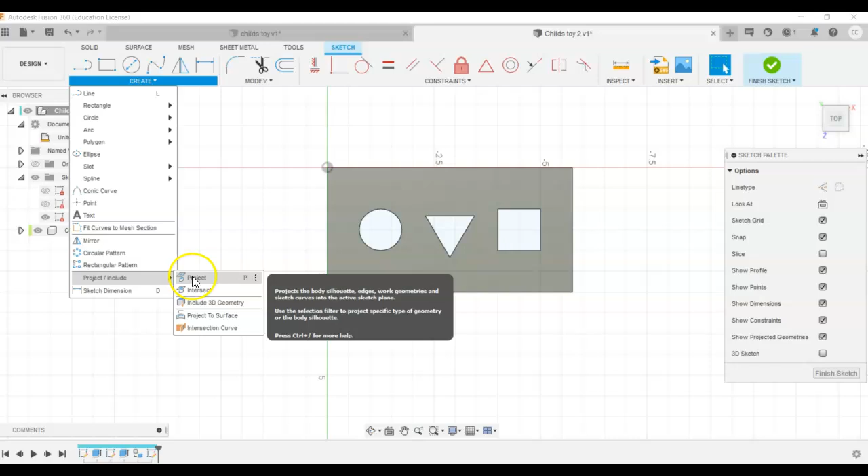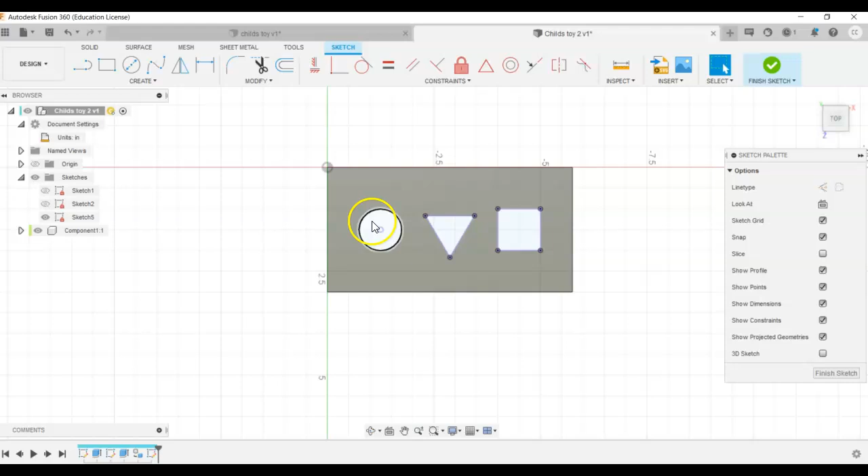I'd like for you to just click the circle and then hold down the Shift key and click all the other lines for all the other shapes. Just click everything you can. Don't stop clicking until all these lines turn blue. Once they're blue, you can say OK, and they turn to like a purple color. When that's done, you can go ahead and finish the sketch.

We're going to use this geometry to make our pegs. So turn on Extrude, click the circle. The dimension for this is 3. And before you say OK, where it says Operation New Body, you want to make that a new component. Say OK. You'll notice the purple lines went away.

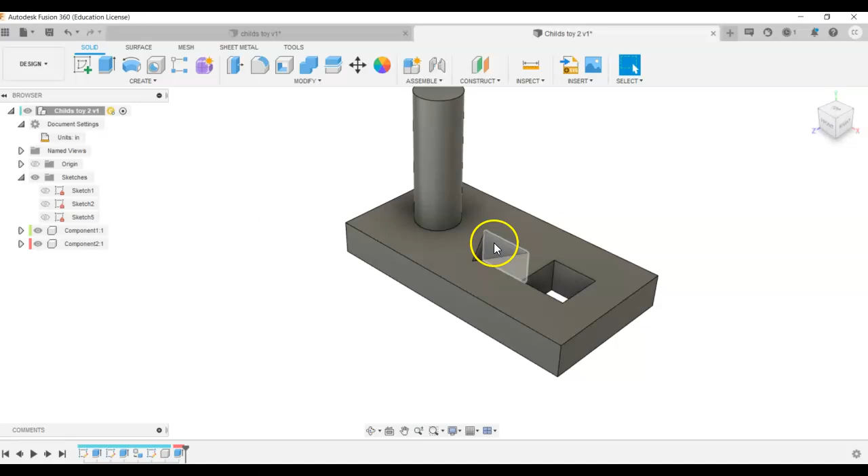That's because our sketch has been what's called consumed. But we can make it visible again by clicking the little eye to the left of our sketch underneath the Sketches tab in the browser. So that makes the sketch visible again.

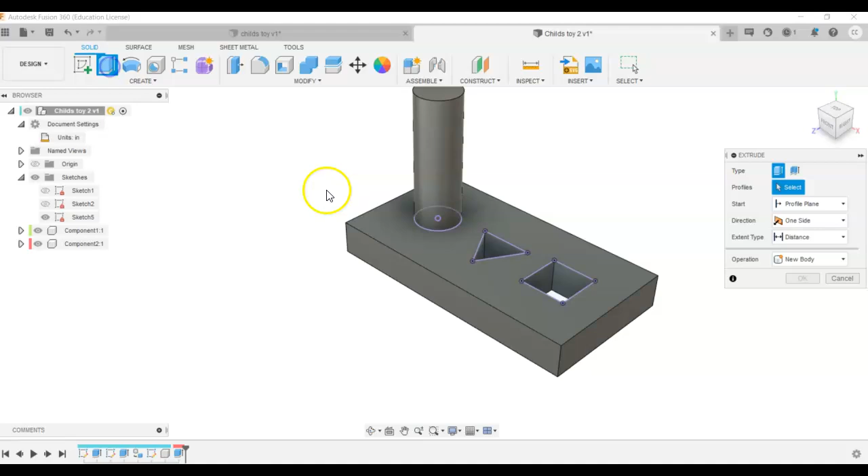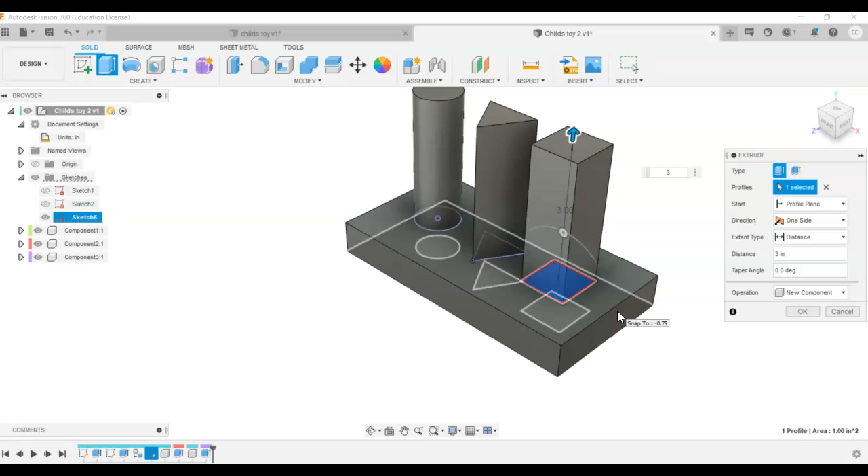We're going to go ahead and do the same thing with the triangle. Click the triangle, make that a 3, and make it a new component. Say OK. And do the same thing for the square. Once you turn the sketch back on and make it visible, it stays for the rest until you make it invisible again. All right, so now we've got our 3 pegs.

They're all their own components. So let's take a minute and just kind of name all the 4 different components we've got. This first one, just double click on the word component 1. We're going to call this one central panel.

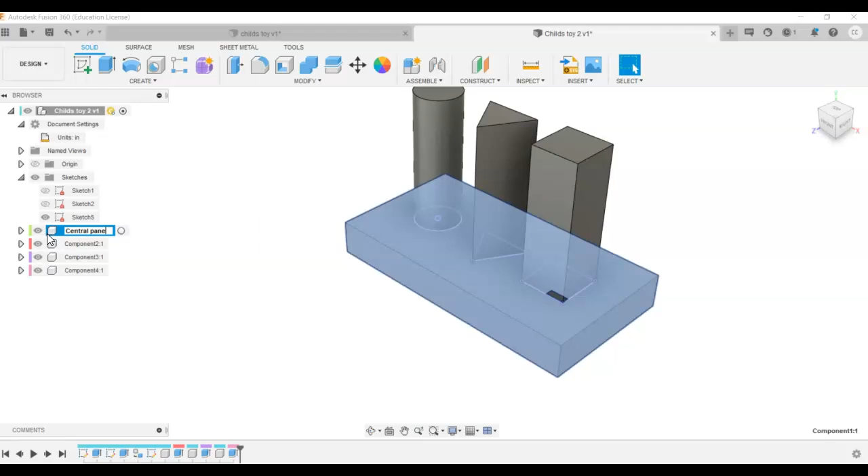And component 2, well, that's the circle. Maybe we'll call it... how do you spell cylinder? Cylinder, I think that's right. Peg. This one is the triangle peg. And this one is the square peg.

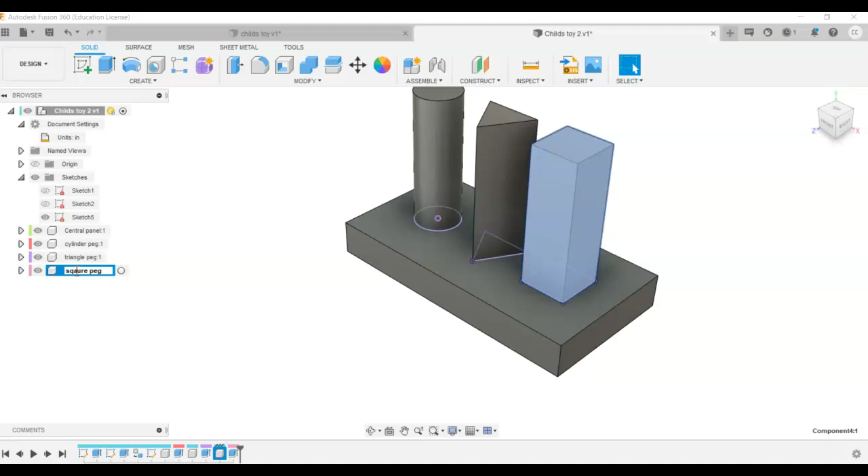All right, so now we've got all of our 4 different components. They're all separate from each other. And let's go ahead and assign some color values to these things.

The sketch is bugging me, so I made the sketch invisible again. I'm going to turn on Appearance up here at the top. And Bodies and Components is what I want. So let's just find some good colors. Under Paint, there should be some good colors.

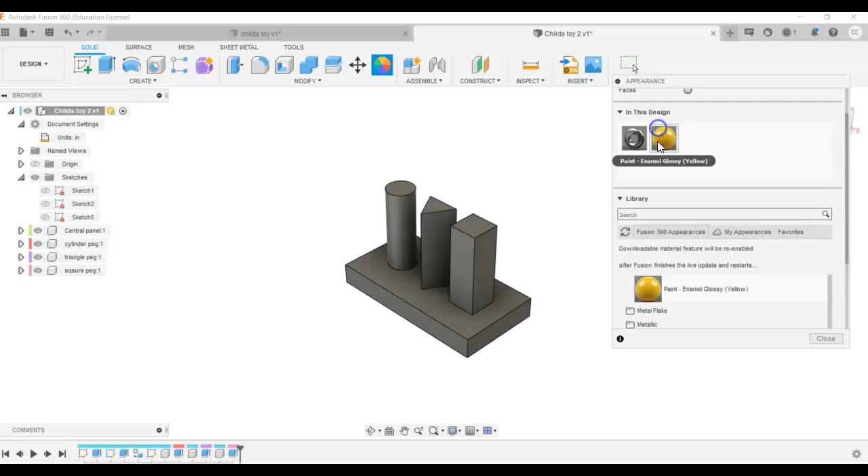How about we go with glossy paint? Let's just do that. So let's have a yellow. And this thing never seems to be tall enough, what we want to do. So zip up here. I like to fill my palette with different colors. We'll make a blue peg, and then how about a red peg? For the panel, that looks like maybe more like it should be wood, so I'll choose Bamboo Light Semi-Gloss. How's that sound?

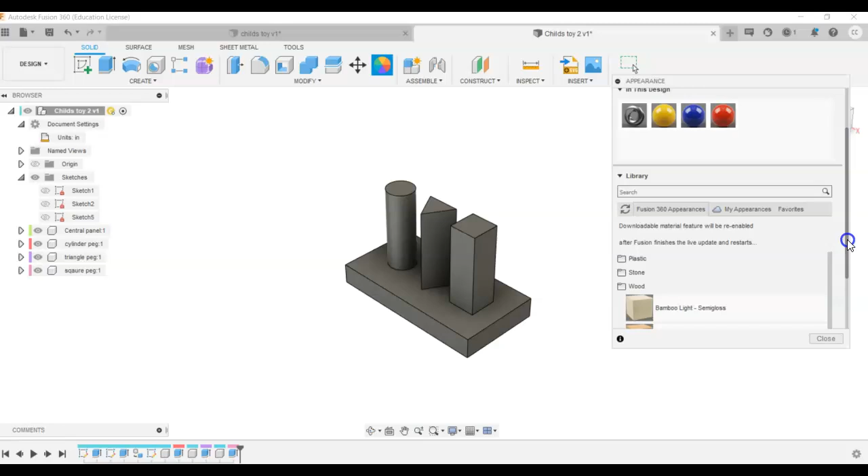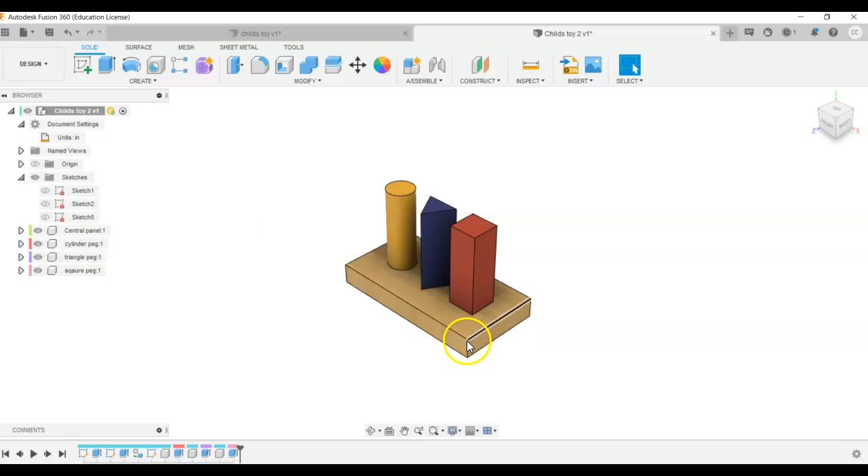Alright, so once they're in your palette, you can drag them over and just assign the different colors to your different bodies. So just go through and drag those over, and now you've got a good looking colored in Child's Toy. Alright, that's going to be the end of this video. For the next video, we're going to make the 2 legs that go to hold this thing up off the ground.